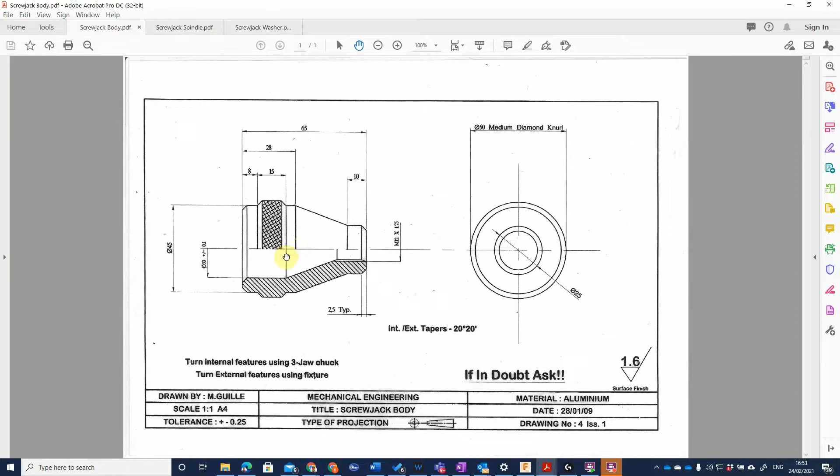So this tutorial, we're going to be using Fusion 360 as of the January UI interface, but keep an eye out on any updates because I know there is one planned for the end of February. So the first thing we need to do is the assemble tools are in here.

Now many people across videos and tutorials and other elements, they draw all of the parts within Fusion 360 space, and then you can hide them when you want to output different components. As I've learned from a different sort of background using SolidWorks, I'm actually going to do it a bit more of a traditional way where I've designed all my parts. They're now located in my data panel, all down here.

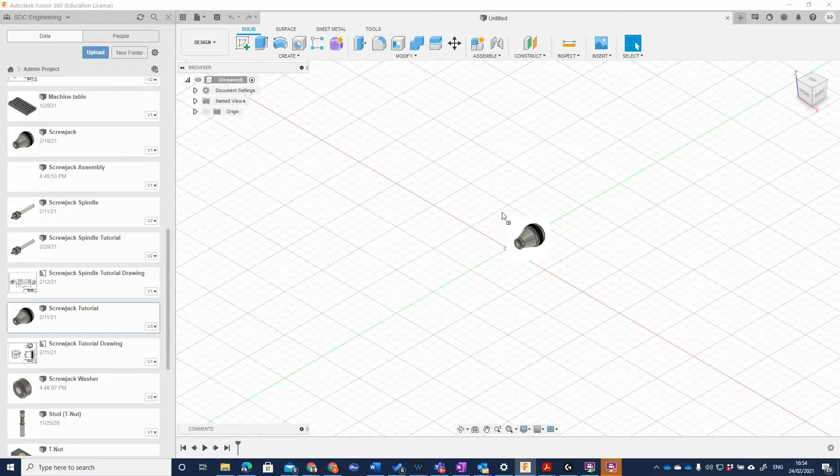And what I'm going to do is bring these parts in as separate entities and then fix them together. So first I'm going to bring in my Screwjack body, and it's going to ask me to save the file because I need to basically create a path for it. So I'm going to call this Screwjack assembly. I'm going to have to call it version 2 because I already have one. I'm going to save that.

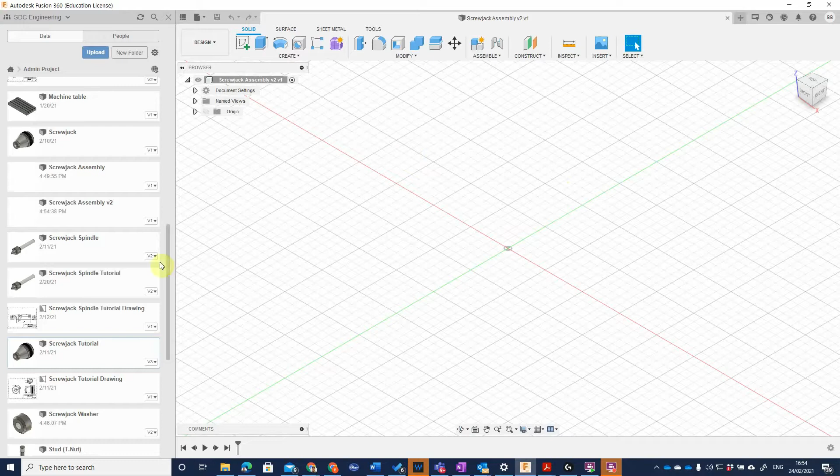Okay, now that I've saved that one, I'm then going to drag my first component in, which is the Screwjack body. And this is now going to create a path into my new drawing, like so. So what I do is then get a move copy tab, which essentially I can translate it or move it or set a pivot. And essentially I don't really want to touch anything apart from set a pivot.

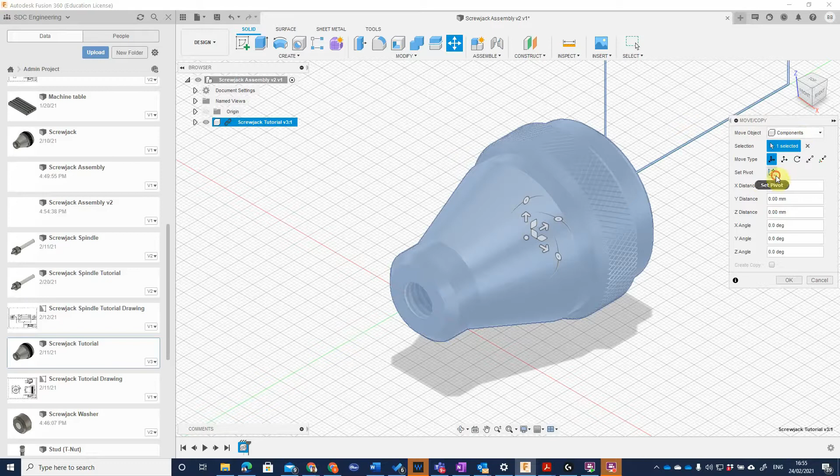It can obviously move around, so I can move it up, down, left, right. It's not actually fixed in its position. So I can press revert and it will go back to its original zone.

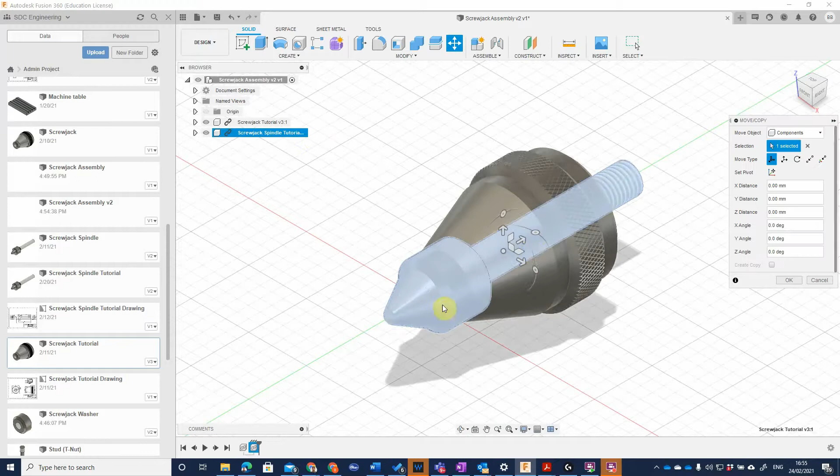The next one, I'm going to load in my spindle. So I'm just going to place my spindle onto the page. This will now sit essentially directly in the right zone. And all I'm going to do is keep it nice and straightforward. Before I apply a joint, I'm just going to move it off of the axis and press OK.

Then what I'm going to do is just bring in my washer. And it's also going to sit within the zone. I'm going to place that on there. So now when I go to the right hand view, I've got my Screwjack spindle, my washer and my body. Remembering that all three of these are knurled, I've only modelled one physically; the other two on the drawings I've put as secondary features.

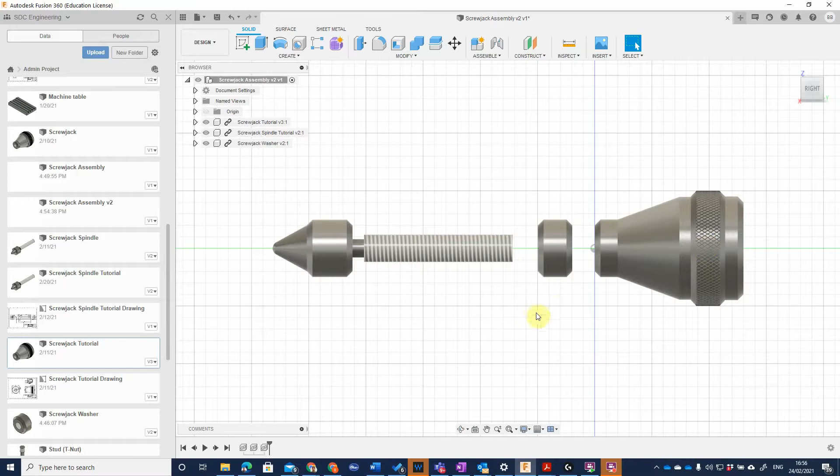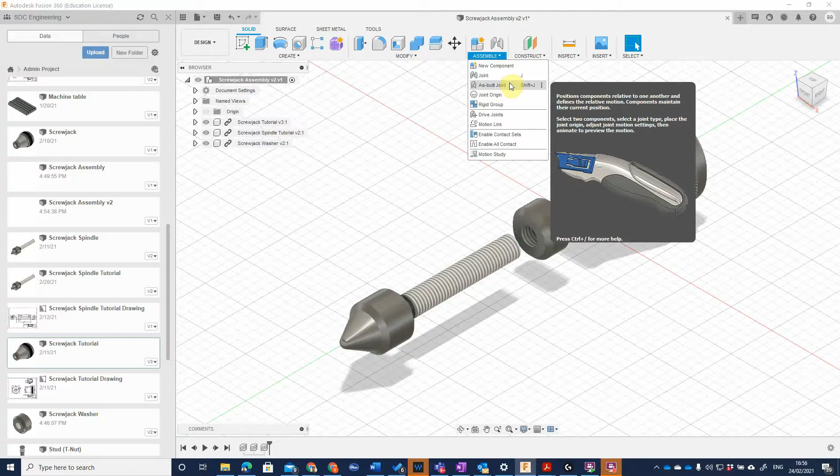So I'm just going to spin it back around to isometric view. I'm going to use the joint tab, which is in the assembly. And there's a couple of options. There's joint, which positions components relative to one another. There's also as-built joint, which positions components relative to one another, captures motion and maintains their current position. I'm not going to do any motion with this. I just want to capture joint so I can set my components.

So the first one I'm going to do is link my Screwjack washer cylinder, as you can see highlighted here. I'm going to take that cylinder and put it onto this cylinder here. So it's now going to slide onto that point.

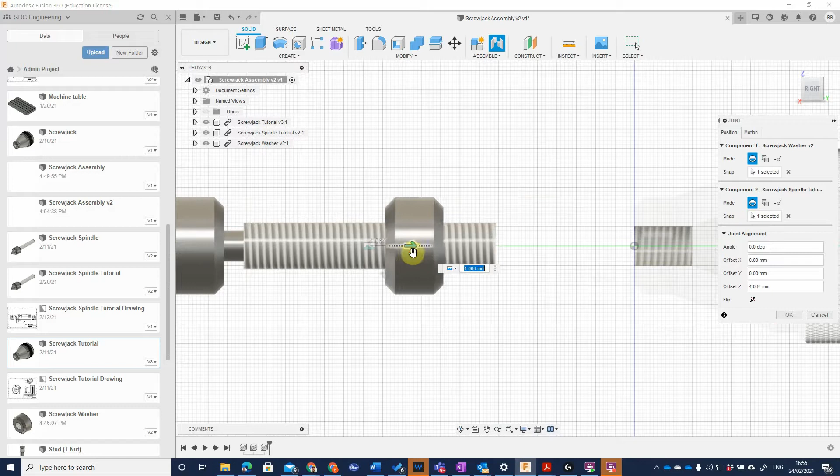What I'm going to do is just position this however I like, so I can come up or down the spindle. But I'm happy with the position it's set as 0, so I'm going to lock that off. Now I can see the two pieces of connection there, which have now been moved. So if I move the spindle, it now takes the Screwjack washer with it.

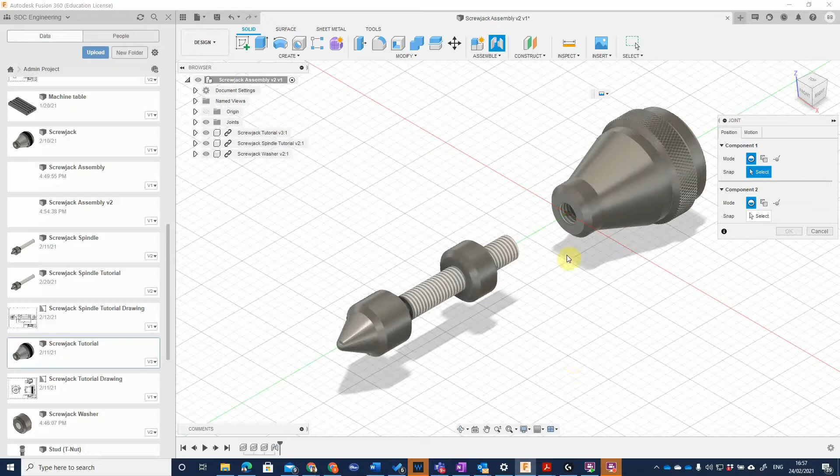So back to the isometric view, I'm going to apply the same joint again, and because I've moved the components, it wants to send the components back, so I'm just going to click continue. And once again, I'm going to select the internal feature first, and now I'm going to select the external feature to match. Now this time it's moved the body rather than moving the spindle, which is fine. I can just move the whole component piece back at a later date.

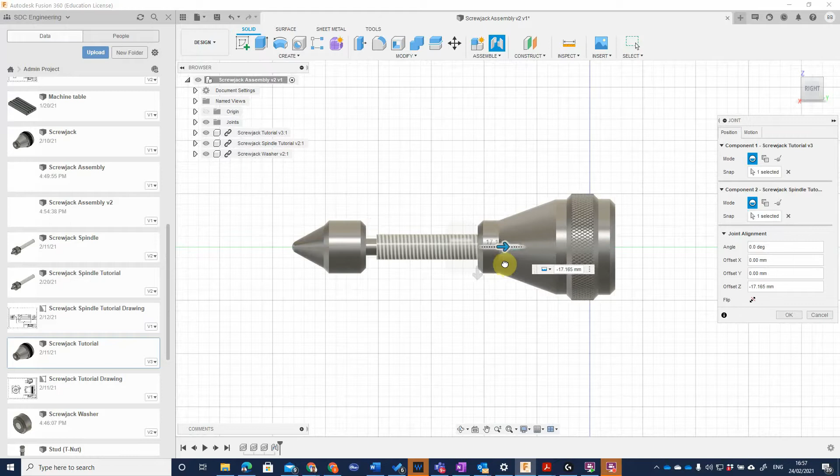Just going to switch around, and I'm actually going to apply the body up until a point where I'm happy with. Now, obviously, the idea here is that I would know where that spindle washer is, but I don't. So what I'm going to have to do is put in an interference at a later date, or I can actually press the side of the component to make it snap. So it's 17.5, which I'm now happy with.

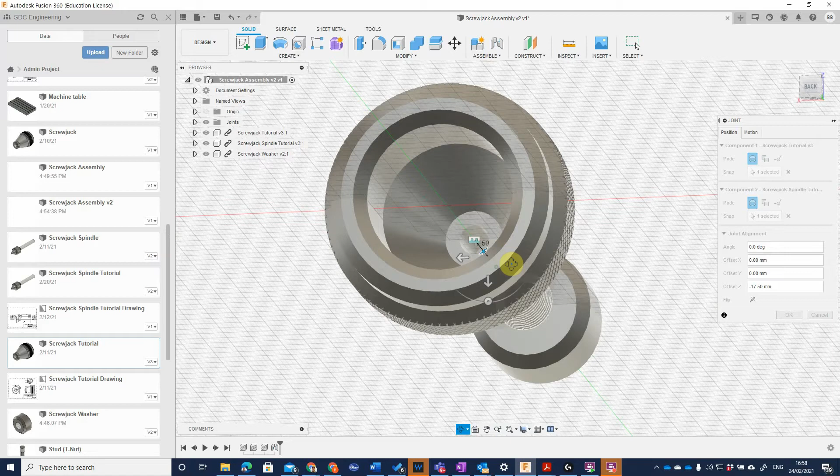I'm just going to check the back. I should be able to see this feature poking through, which I can roughly, if I align a little bit, you can see it poking out through. So I'm happy with that. Okay, that one off. I've now got my washer and my spindle, and it moves all as one big component because it's jointed. The only way that's not jointed is none of this is jointed to the actual datum.

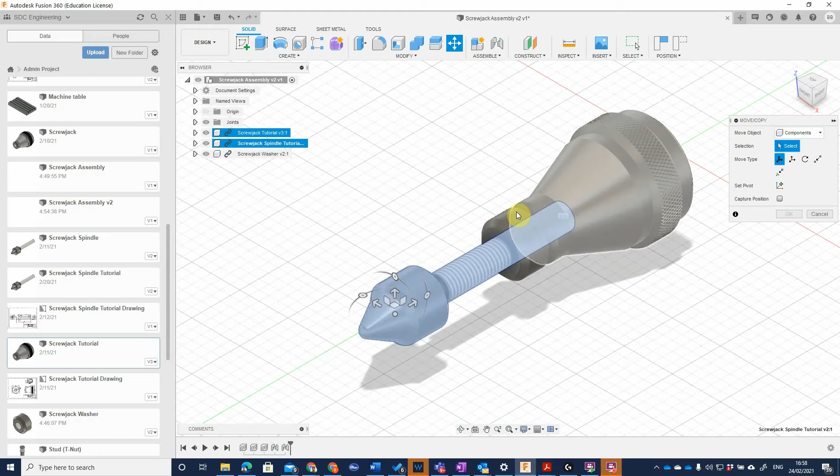So again, I can do that under move. I can choose components, bodies, faces, so I'm going to choose components. I'm just going to choose 1, 2, 3, 1, 2, 3. What I'm going to do is spin this around.

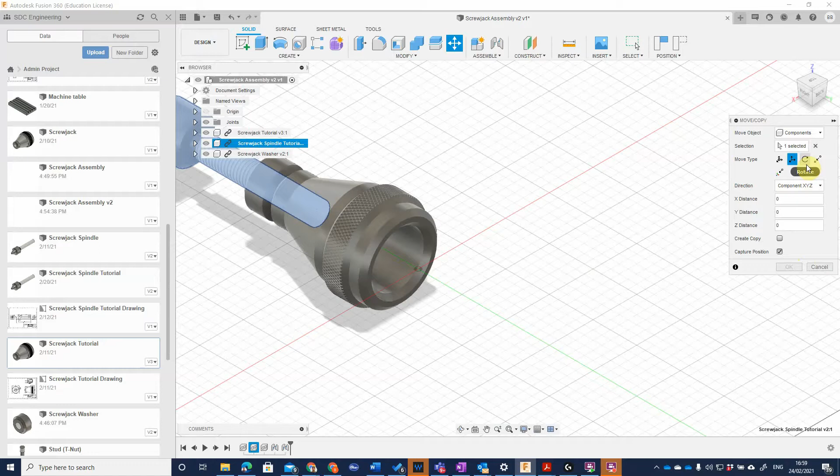I want to translate this to point to X, Y, Z. So I'm going to place 0, 0, 0. So what I'm going to say is it's going to be 0, 0, 0. Capture position. Obviously, if I do move it a bit further around, it will then ask for the accept button, but it is on the 0, 0, 0 plane. So I have that feature now installed.

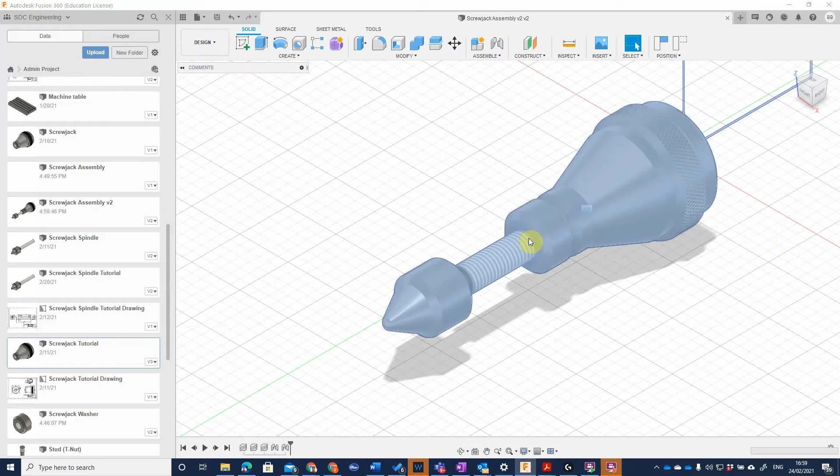What I can do if I want to is go to the drawing, design, and I could actually create a full assembly, visible side only, or I can select what ones I want to bring through. So I want a full assembly, create them from scratch. A3, which is fine, and this is going to now basically allow me to populate my assembly drawing, which will then coincide with my other drawings for my Screwjack.

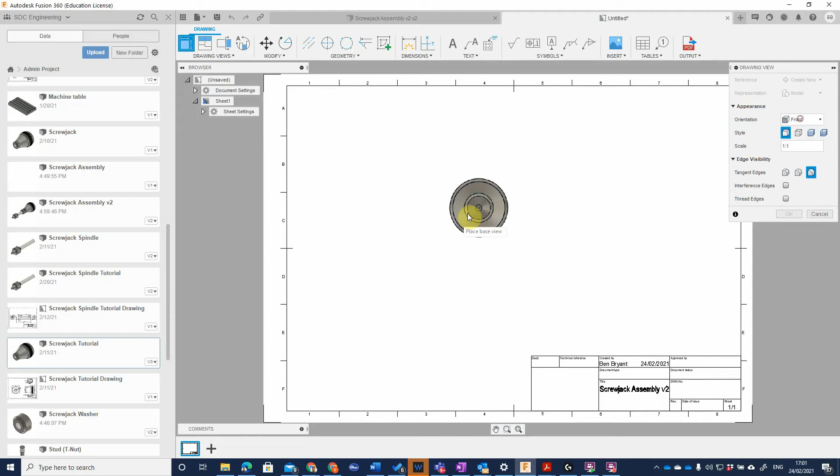Okay, so the drawing element is now opened up, and what I can now do is bring my features in. So I'm going to change this to 1:1 scale because I don't want it very small. I just want visible edges only. I'm going to start off with my front, which is fine. So I'm going to place my front view and click the OK button. And now I'm going to project the rest of my views over.

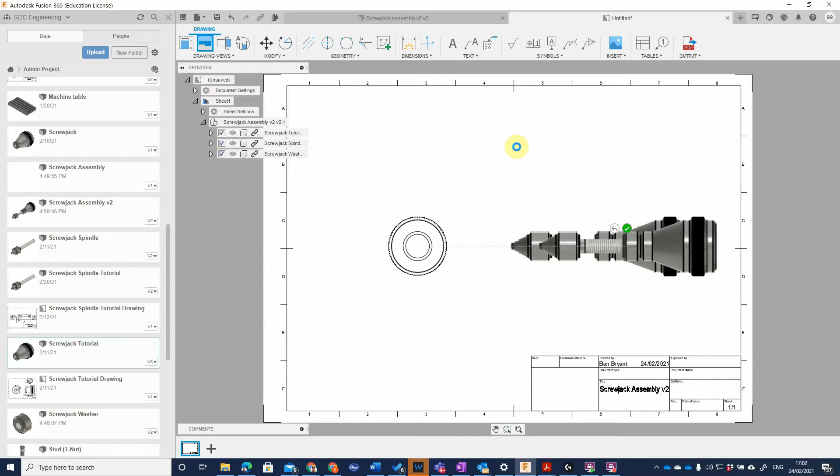Like so. And then obviously if I come up, I get the same view as my right hand view. So I'm not going to worry about the top view on this one. And lastly, what I can then start to look at doing is bringing in the bill of materials. I can look at then doing an assembly table and aligning up my balloon bubbles for features. So that's now loaded in.

So I can come along now and bring in a table to do a parts list. So I'm just going to put the parts list in the top corner up here. So now it's brought in my Screwjack. Basically copy what I called it, Screwjack tutorial, spindle tutorial, and jack and Screwjack washer. I can come in and put the part name if I wanted to, and a description.

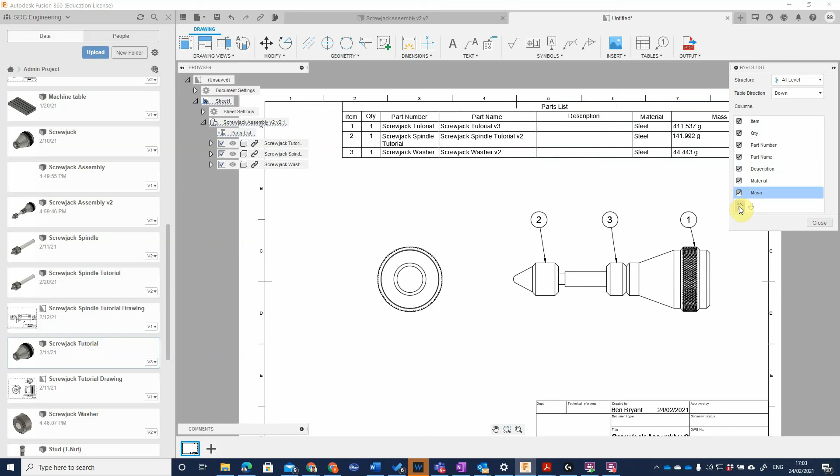So I do want it down, first level, all level, close. I could actually, if I wanted to, include a part name, mass as well. So that gives me the densities, like so. And then I can obviously output a description if I needed to. So there we have it.

There's a quick 10-minute tutorial on how to achieve an assembled part using the joint feature within Fusion. Also updating a parts list and an auto balloon bubble. My next stages will be now to finish off my title block and get this outputted to my client.